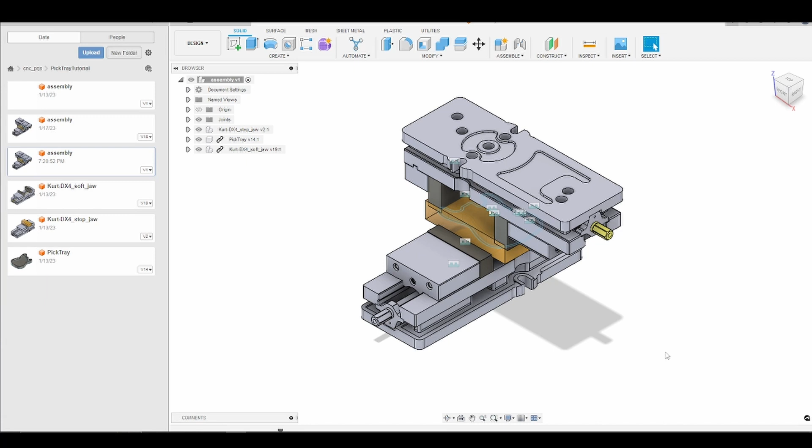The first thing we're going to get into is the vise setup. I've received some feedback that maybe the way that I am joining one vise on top of the other might be slightly confusing. So another way we can do this is put two vises on the same plane instead of joining them on top of each other. I'll go ahead and show you how to do that now.

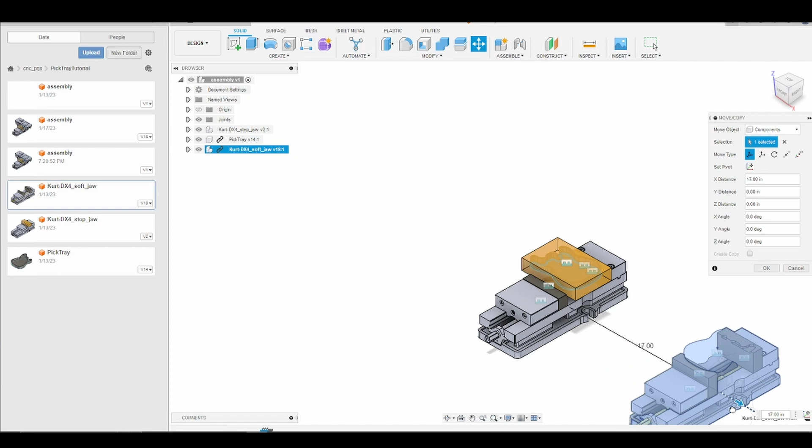We'll start by deleting our soft jaw vise. Then what I'll do is drag in another soft jaw vise, and we'll keep them on the same plane. I'll zoom out a little bit, drag it over, press enter, and go back to our home view.

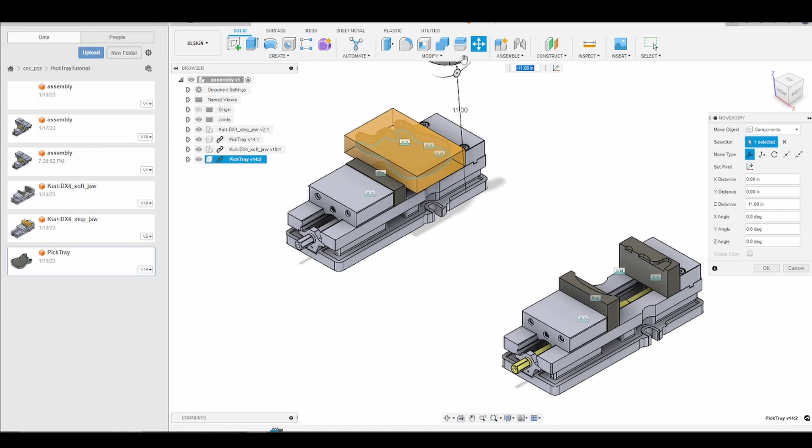Now what I'm going to do is bring in our guitar tray model. I'm going to rotate it 180 degrees and move it up and out of the way. Press enter. Now I'm going to joint the guitar tray to our soft jaw, so I'll press J for joint, and just join it to the soft jaws as we would have in the previous tutorials. All right, there we go.

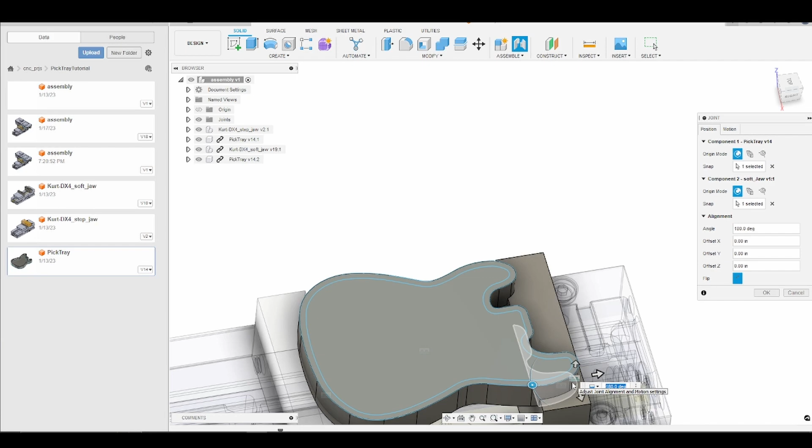So now we have our two vises on the same plane, and we'll take this a step further. We'll go ahead into our manufacturing tab, and what we'll need to do now is adjust our setup as well as a couple toolpaths.

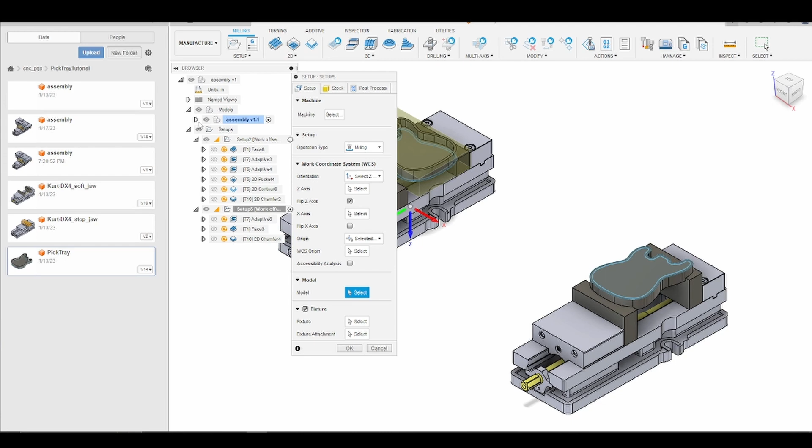So I will edit the setup. What we're going to do is clear the model, and go back into our assembly, go through the drop down menu and pick the new pick tray model that we dragged into our assembly.

Next thing we're going to want to do is update the fixture. So we're going to select the fixture and select all the components from the latest vise that we dragged into the assembly. Okay, that looks good.

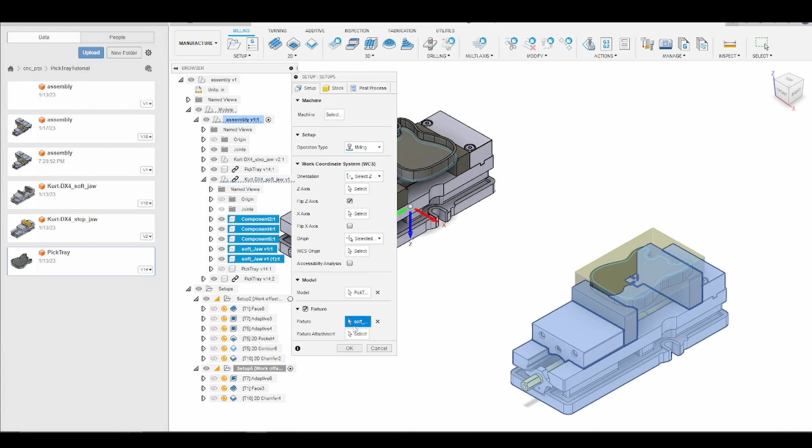The next thing we're going to want to do is select our work origin. Again, I'm going to use a selected point, and I am going to orbit, and we are going to select the upper left corner of the soft jaw again. Then we're going to make sure that our axes are in the proper orientation for our machine.

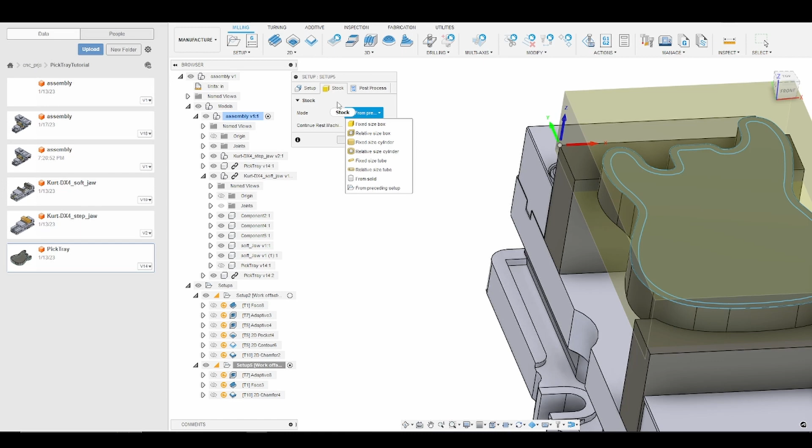We will go to the stock tab, and we'll make sure we have from previous operation, or from preceding setup, which is what we do have. We'll click OK. Now you'll notice it doesn't look like our stock carried over from the previous operations, and that is because we need to go ahead and generate all of our toolpaths again. So I'll go ahead and do that.

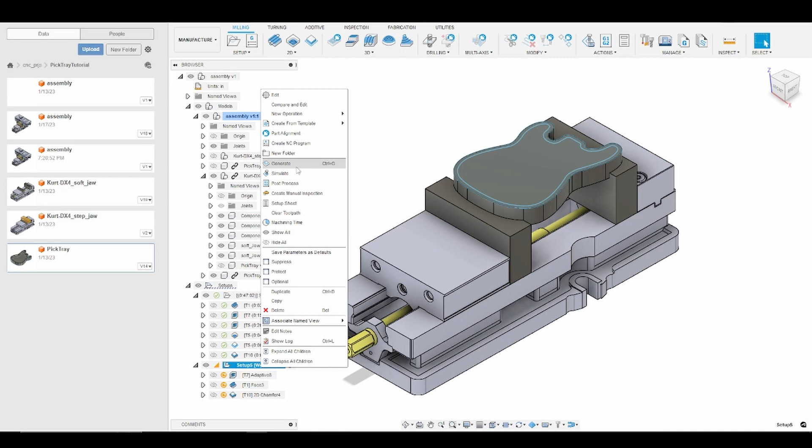It'll take a minute. All right, so now we will generate the toolpaths for our second op. And voila, you see that our stock has updated. Now, as we did in the previous tutorials, we can toggle back and forth between our two operations smoothly, which is what we want.

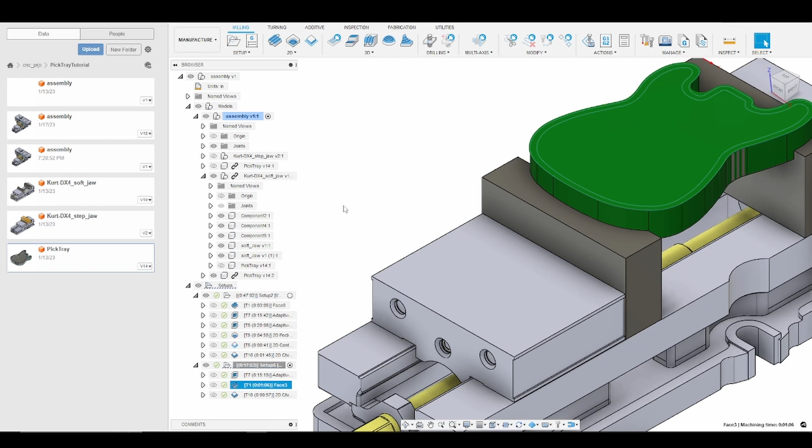Now the geometry, if we step through our toolpaths—let's zoom out a little bit—the geometry for our facing and our 2D chamfer needs to be updated. So we will go ahead and do that now.

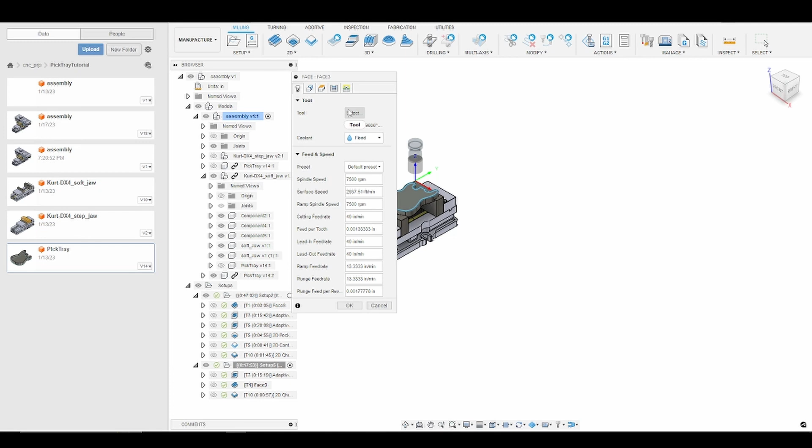So I will just click on the facing operation. I will go ahead and go to the geometry tab and clear and reselect the geometry. Now it automatically moved it over to where it needed to be. We'll look at our top heights. We're 20 thousandths above the model top, which is perfect—that's where we wanted it from the previous tutorials. So we'll click OK, it should generate, and now you notice our facing operation is where it should be.

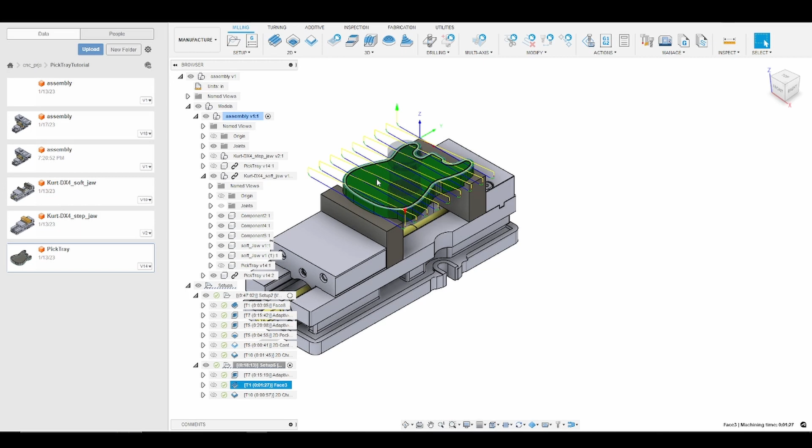And we also need to do that for the chamfer. So we'll go to geometry, clear our geometry, and then go ahead and select the outline of the pick tray, press OK. And now our chamfer has been generated.

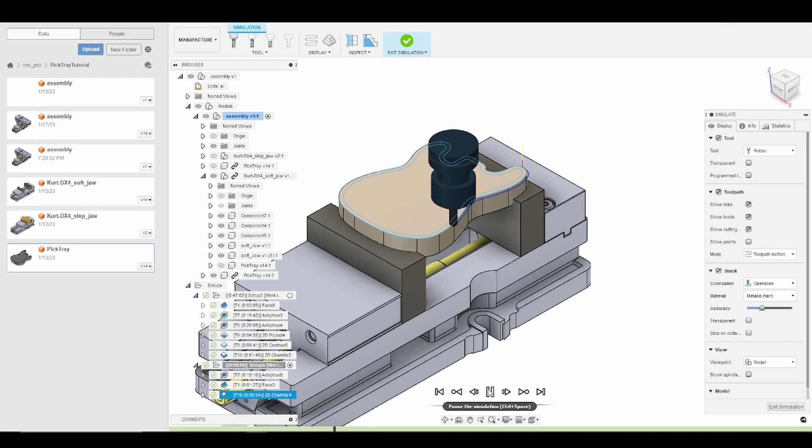We can go ahead and simulate both of those operations just to make sure that we didn't do anything dumb. We don't want to ruin our part, ruin our end mill, or crash our machine. All right, everything looks smooth there, so I'll stop that. We'll go ahead and then simulate the facing operation.

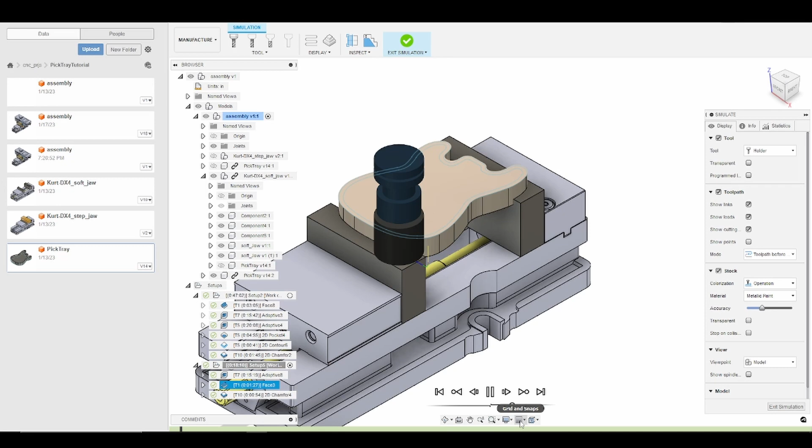And again, maybe speed it up a little bit. As you can see, we faced the tray, the guitar tray, without any issues. So I think moving forward, I will go ahead and proceed using this setup. It's a lot cleaner, there's a lot less orbiting.

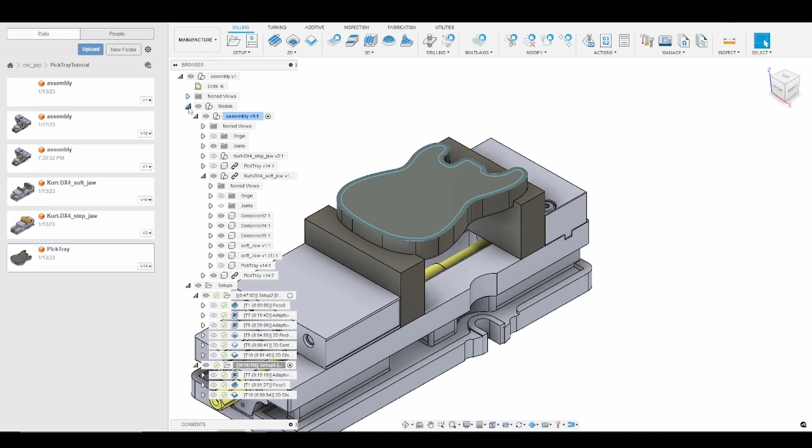We still use 2 vises, right? My main concern is I like being able to have all of my operations set up in one assembly so I can easily toggle between them. So we'll go back to the design workspace, that way we can see how the setup looks compared to how it looked previously.

Okay, so the next question I had, let me zoom in here to the soft jaw setup, was why did I make the soft jaws hold the guitar in a vertical fashion? I'll use the example of a pop can, so all the strength is in the vertical direction. If you imagine crushing a pop can, it's much easier if you just squeeze on the middle. So my thought was, if I put the guitar in a vertical position on the soft jaws, I'd be less likely to deform it under clamping pressure than if I turned it horizontally and squeezed in the middle. I could be wrong, that was just my thought process.

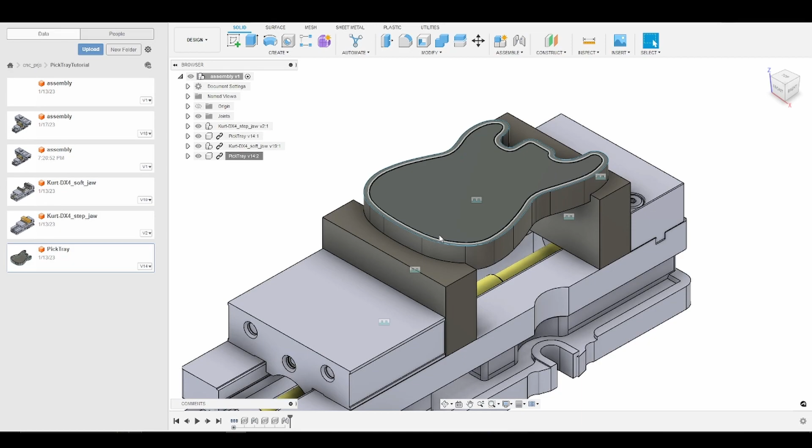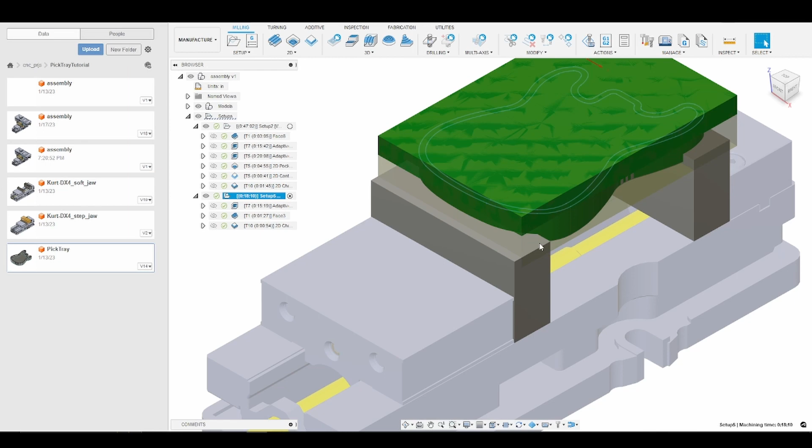One of the final questions I had was, why did I use a 3/8 end mill rather than the shell mill to remove the hat of material left over during Op 2 when we flip our part? Let's go into CAM and examine that. We'll go to the manufacture workspace, and you'll notice the top hat of material is rather thick.

I don't have a bandsaw at this point in time. I order my stock oversized and pre-cut so I can do a number of projects with one size of stock, which means I have a larger hat of material than would be ideal for making this part. So my thought process is, because this hat is so thick, I can just use my roughing end mill and remove that material much faster than if I took a bunch of passes with the shell mill. It would be a different story if the hat was thinner and I could come down in 3 or 4 passes.

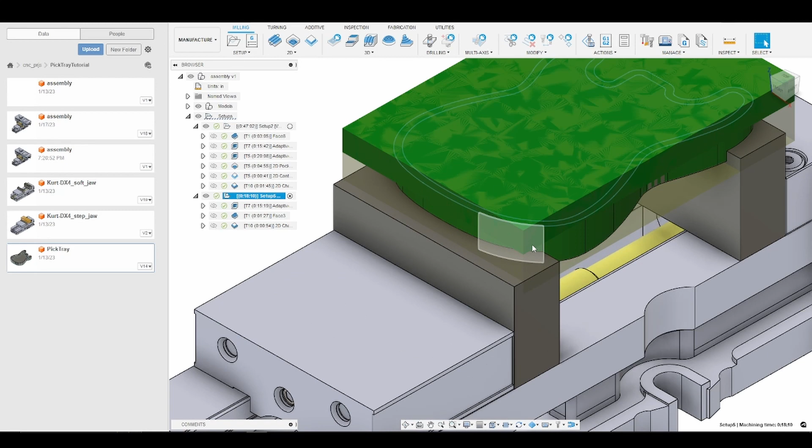Then that would be the approach I would take. However, because of the way my stock is sized right now, it's faster for me to use that 3/8 inch end mill and go full depth of cut to remove that hat of material as fast as I can. And then I still use the shell mill after that just to get a nice, beautiful surface finish on top. The last question I had was, why did I go 50 thousandths below the edge of the stock when I machined the top hat away on the back?

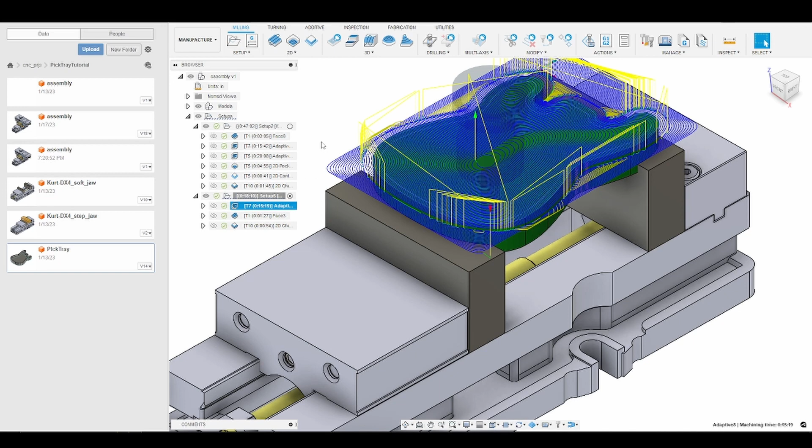So I'm going to show you something interesting. If I go back into the adaptive clearing, this is where I'm removing most of the material from the guitar pick tray. If I go to heights, and instead of minus 50 thousandths, we'll just go 0. So our bottom height is just the top of our model.

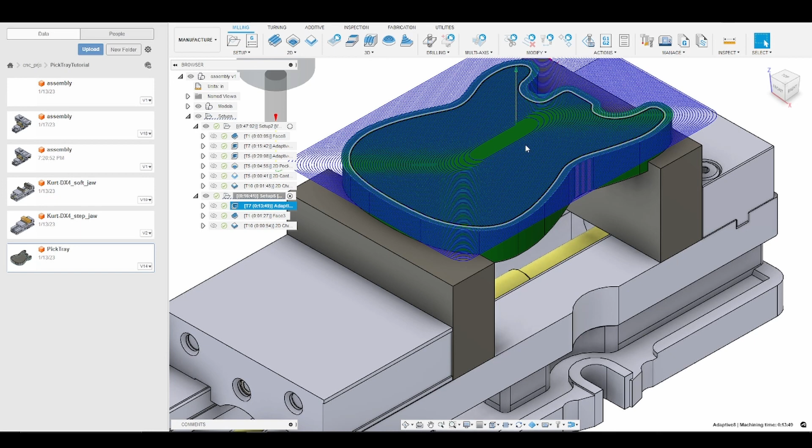What I'm trying to avoid here is, you'll notice this long, thin wall. If you've ever been in a situation trying to machine this long thin wall, you can run into a case where I call it the screaming howl of death. You get a lot of resonance cutting this thin wall, and then there's a nice loud pop when it's torn off by your end mill and thrown on the side of your enclosure.

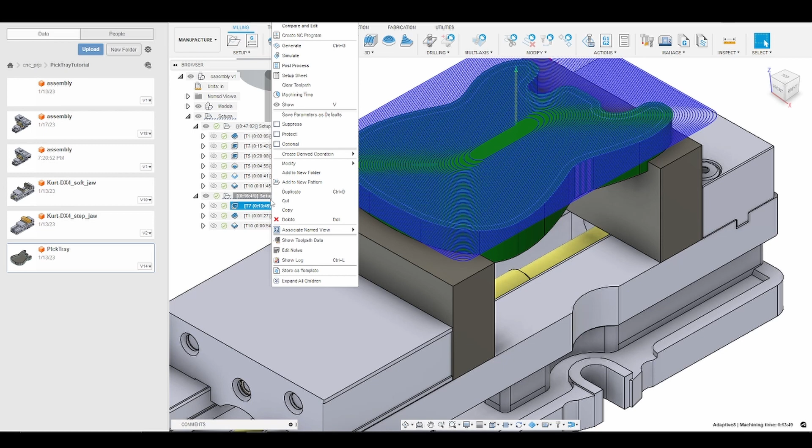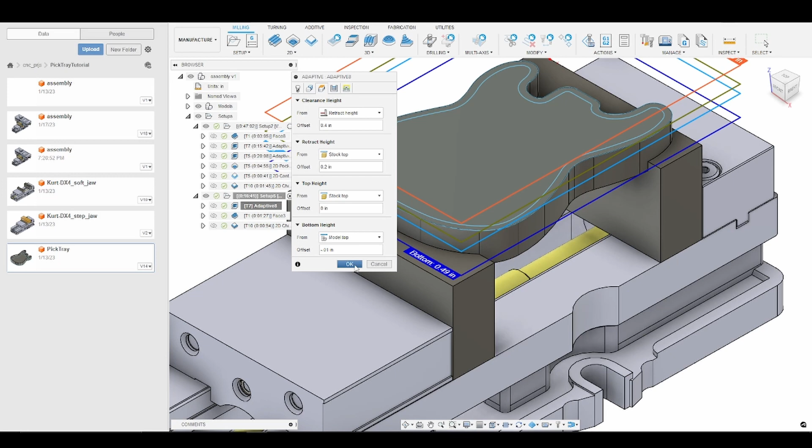So what I like to do, and maybe there's an easy way to do this, so if you know, drop it in the comments. If I go back to my toolpath, right click and edit, and if I just go below the top of my model—it doesn't have to be 50 thousandths if you don't like 50 thousandths, it's just what I chose—we'll go 10 thousandths just for an example. So if I go below the top of my model.

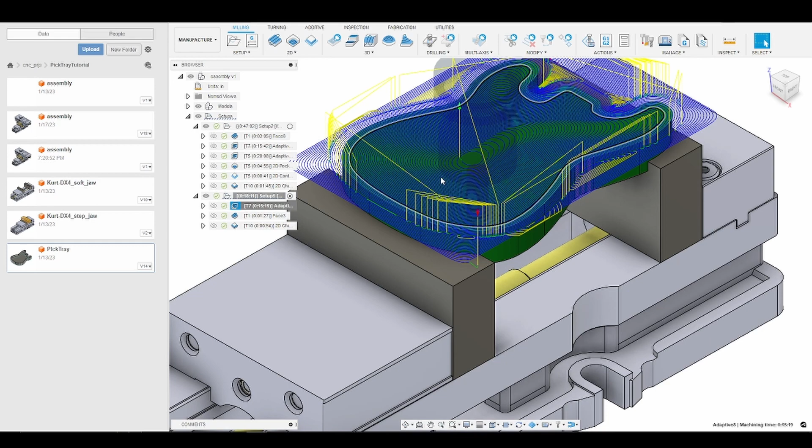Now watch what the toolpath looks like. I get this nice smooth circular motion where there isn't this long thin wall that will cause a resonance issue, and I have a risk of ripping that, or my end mill getting tangled in that thin wall and pulling my part out of the vise. So that was my reasoning for doing that. If you ever run into a situation where you have this long wall going vertically across your part, try going below the top of your part just a little bit and see if your toolpath updates to be slightly smoother in nature.

All right, so that does it, those are sort of the improvements. I already have the Pokeball ashtray tutorials in the works, so I won't update my vise setup for those. But going forward, I'll try to keep the vises on the same plane just to prevent confusion, so we don't have to go through all the orbiting we would have had to before.